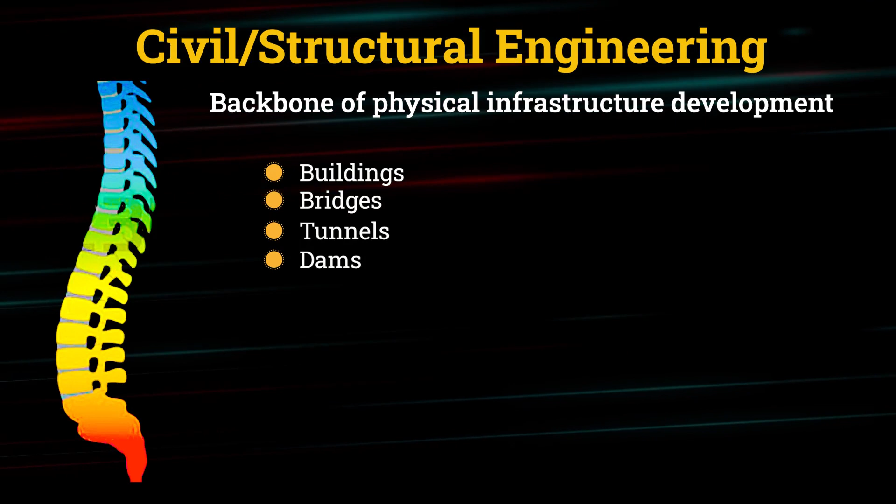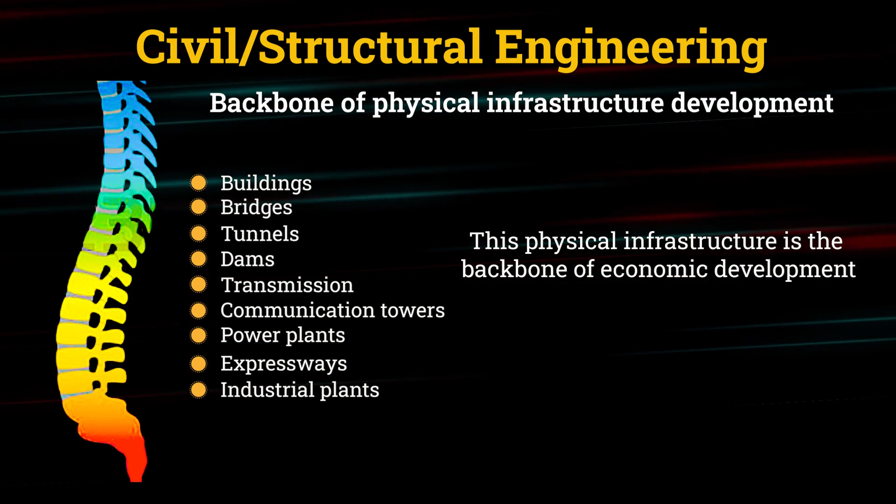This physical infrastructure is the backbone of economic development. So in a way, structural engineers are directly responsible for the economic development of the country and continuity of life. They help to preserve the past, protect the present, and build the future through reduction of the risk to disasters to the built environment.

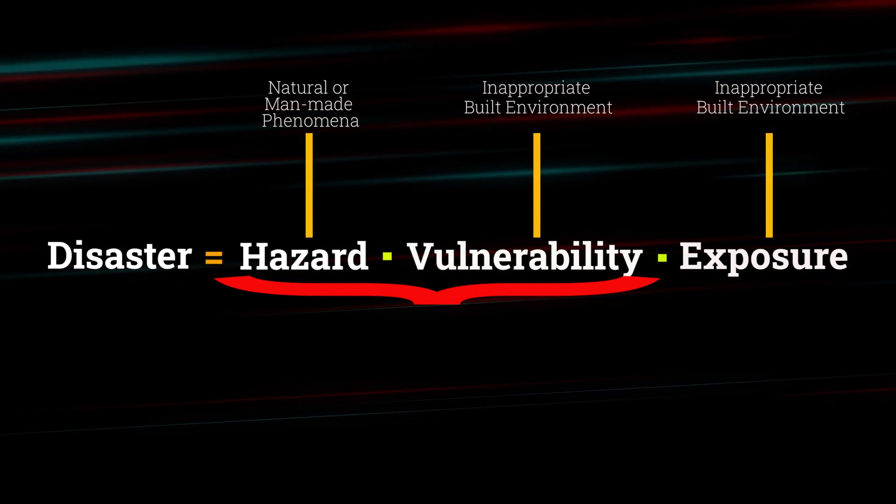So the economic development and life can continue. Disaster is a combination of natural or man-made phenomena, such as earthquake, wind, or fire, and vulnerability is the inappropriate or weaknesses in the built environment. The exposure is the people and property that are affected by this hazard. This risk can be reduced if we can reduce the vulnerability or make our structures perform well when subjected to particular hazards.

To do that, structural engineering has to develop its methodologies, its design process, and its approaches, and also integrate emerging technologies into its process, such as AI, robotics, and so on, and also develop the use of appropriate tools, software, guidelines, and other methodologies that can help the process.

Over the years, the design approaches have been developing, especially for seismic design, starting with intuitive design to code-based design, where several factors and various procedures are specified to tackle certain types of structures and hazards, to performance-based design, where the performance is explicitly evaluated and compared against the hazards. That leads to consequence and risk-based design and to resilience-based design.

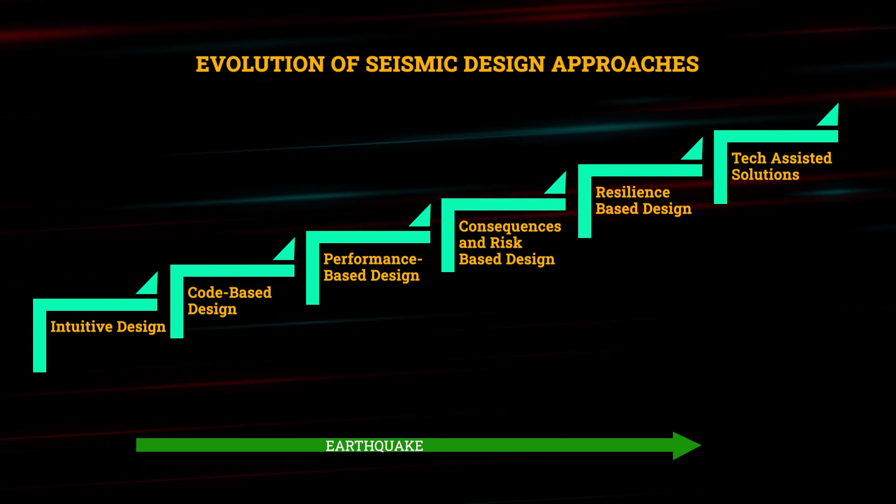And finally, the application of other technologies that assist in the design solution and also in the control of the structural response. Earthquake has been first to adopt many of these approaches, and wind design is following in its footsteps. Currently, mostly it is done by code-based design, but in many countries it is also progressing to performance-based design.

So let's look at performance-based design first. In performance-based design, hazard and the response fight directly and fairly to determine vulnerability, taking the code-based factors and restrictions out of the equation. So in this case, the appropriate hazard and the vulnerability are compared directly to see whether the structure will perform well or not.

The basic concept behind performance-based design, therefore, is to take the structural response, which is determined from the basic material response, such as steel and concrete, and the cross-section dimensions and the configuration, to determine the cross-section response, which in turn leads to the member response, and finally to determine its capacity through a pushover curve or any kind of nonlinear determination of the response.

On the other hand, the earthquake risk or seismic risk is determined through the time history of the ground motion, expected ground motion, converted into spectral acceleration and to spectral displacement, so that the two can be compared directly. This comparison between the structure's response and the hazard or the demand leads us to a common point where we can determine whether this performance is acceptable or not.

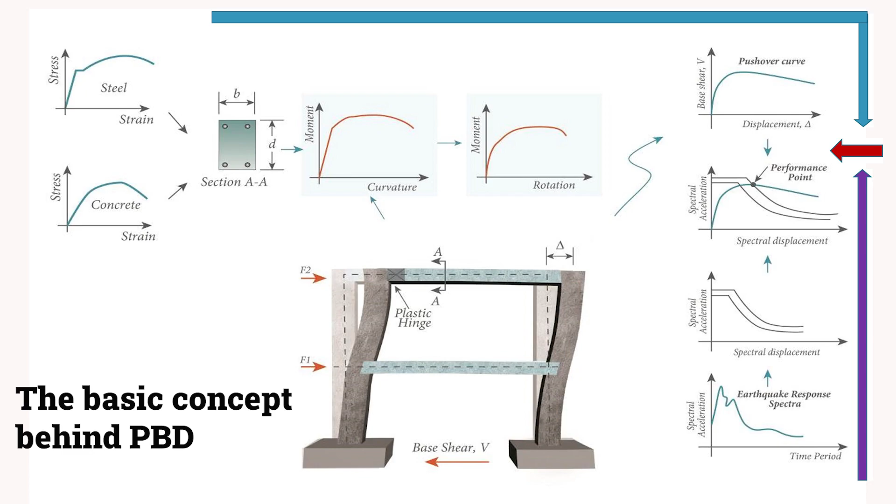And if this common point does not exist or is at a location which is not acceptable, then we can go back and modify the design, increase reinforcement, modify the materials, and so on, until we get the response that we expect. Therefore, the design decisions are explicitly linked to hazard levels and the key performance indicators.

The key performance indicators in structures can be many, but here we can consider some of them as the most important one, especially for the case of buildings. The first one, of course, being the stability, that the structure should remain stable. Second one is the strength, that the parts of the structure which are strength controlled should not fail. And then the deformation, the structure should not deform a lot.

Drift control between the stories, ductility of the members that will provide sufficient resistance to seismic demand, and energy dissipation together with ductility that will dissipate the seismic energy without causing unacceptable damage. And finally, the motion perception, that means acceleration and velocities and displacements produced during the dynamic response.

To carry out this kind of analysis and to determine these indicators, we need a thorough understanding of the nonlinear dynamic analysis. We also have to have an agreement of various stakeholders which are involved and to obtain the right information about the site and the materials.

And we need to have the right kind of software that carries out this analysis, and the guidelines to follow. Most importantly, we need to have an ability to interpret the results in performance terms so that we can see whether a certain response is acceptable or not. And because this is a very intense and complex process, we also need a lot of patience because it might take much longer than the traditional design.

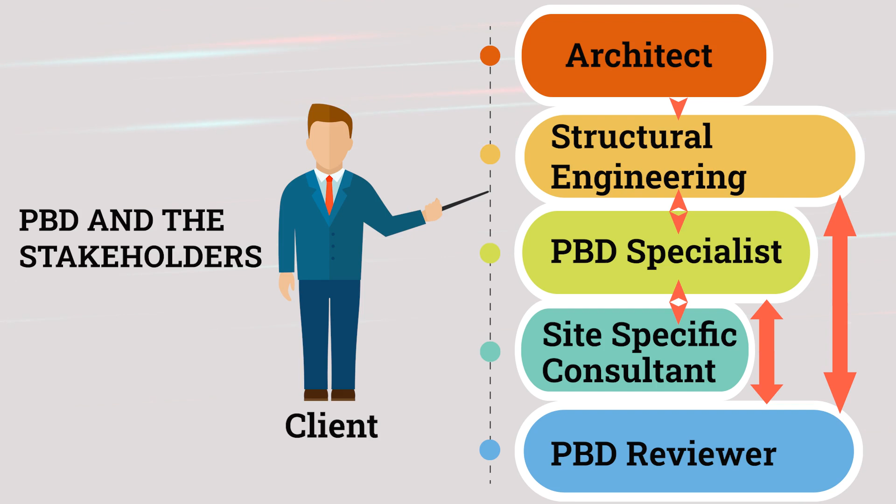The stakeholders involved in the performance-based design include, of course, the client, the architect, and the structural engineers. But on top of that, we also may need a special PBD specialist or a PBD consultant, a PBD design reviewer, and a site-specific consultant, all working together to ensure that the structure has the expected performance as required by the client as well as by the typical structure that we are designing.

There are several tools available to carry out the analysis, but from CSI, the three most commonly used tools include ETABS, which is for building analysis and design and has full capability to conduct nonlinear analysis and performance evaluation, and Perform 3D, which was specifically developed for performance evaluation, and SAP2000, which can be used for the nonlinear dynamic evaluation of any kind of structure.

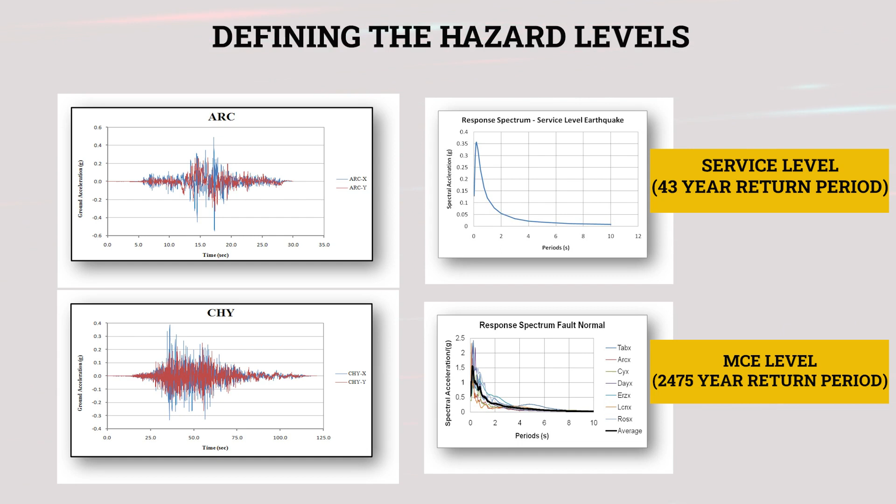The first step in this process would be to determine the right kind of hazard levels. And typically for seismic evaluation, two levels are used. One is the service level, which corresponds to a 43-year return period earthquake, which is expected to occur frequently. And the second one is the MCE level, which is a rare to very rare earthquake event that may come only once in 2,500 years, roughly.

Once the appropriate hazard levels have been defined, the next step is to define the corresponding acceptance criteria or acceptance levels. For example, for a service level earthquake, the frequent event, the structure is expected to remain fully operational. Whereas for an MCE level or rare earthquake, the structure might be expected to be damaged heavily or lightly, but in any case, preventing a complete collapse and loss of human life.

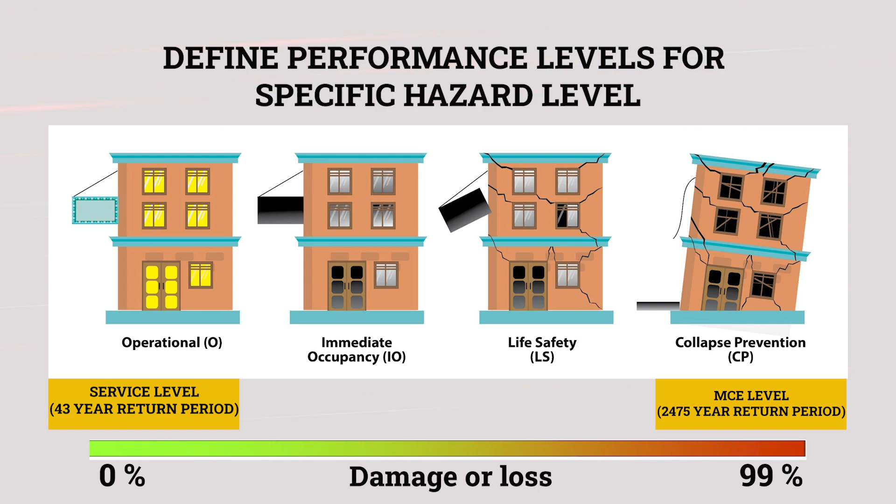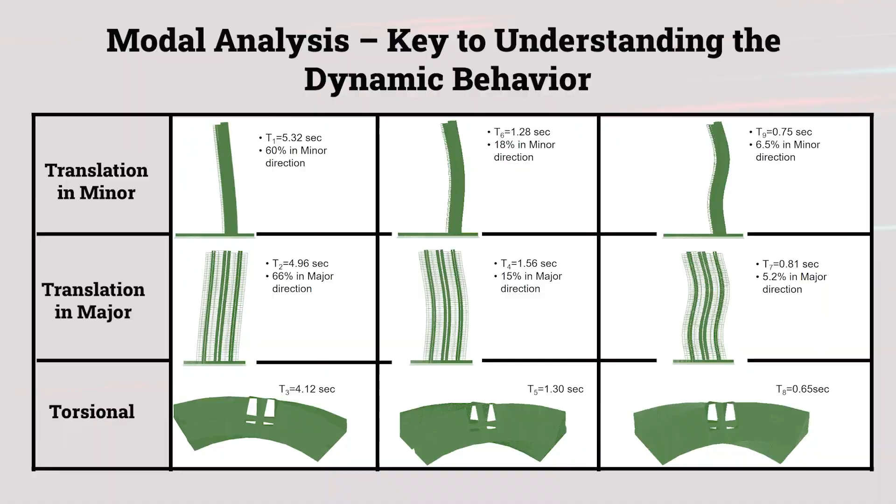To start the process of the analysis, the first step is to always determine the modal response and look at the natural period and the mode shapes as well as the mass participation ratio, to make sure that the model has been created properly, that the model has the right basic dynamic response, and the natural periods are within acceptable limits, as well as the mass participation ratio is appropriate for the structure to move to the next stages of analysis. Once the modal analysis has been determined properly, then we can be assured in a way that the dynamic response, which is a summation of individual modal responses, will be adequately computed.

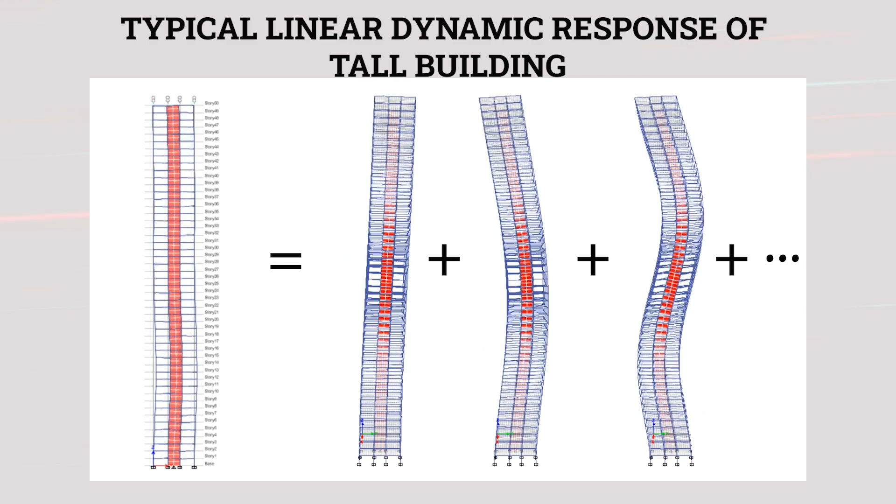The next step would be preferably to look at the nonlinearity of the structure and capture the nonlinear response before carrying out a full nonlinear dynamic analysis. This is typically done by carrying out a pushover analysis, which is a nonlinear static approach using monotonic loading. And this basically gives us some indication of the structure's nonlinear capacity, as well as its relationship with the yielding of various components, its weaknesses and its strengths.

In this particular video, we can see that the structure is deforming, and while it is deforming, it's also yielding, and the damage is occurring in some of the components at various locations. And this kind of analysis is useful to make sure that the nonlinear properties have been defined adequately.

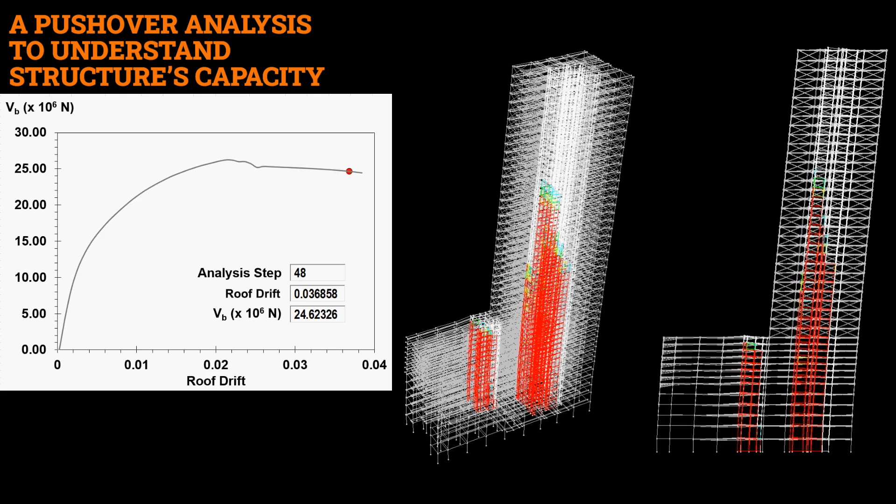The next one would be to carry out a full nonlinear time history analysis to determine the structure's vulnerability to the particular earthquake. In this case, several time histories have to be defined or determined, and the analysis has to be carried out typically from 11 up to 20 or even 30 time history analyses, depending upon the type of earthquakes that we are considering, as well as the type of structure being analyzed.

In this animation, we can see that once the ground motion input is provided to this nonlinear model, we can determine where the damage will start as the earthquake progresses, and then we can monitor the response of various components.

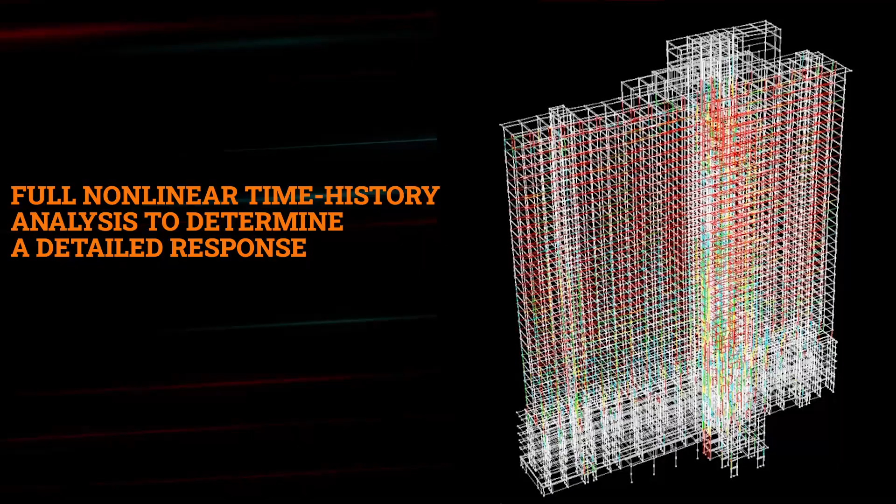In this case, we can see that some of the connections and joints are first reaching their capacity, followed by various other members in the structure. We need to continue this analysis until the entire ground motion is complete or the structure fails to continue to perform well.

Once the nonlinear analysis as well as linear analysis have been completed, it is always a good idea to compare the base shear generated from various types of analysis for various types of demands, so we can get a picture of the level of forces being generated from earthquake, from wind, at MCE level, and at the service level. This also provides a sanity check on the structure's overall response, because these percentages should be within a reasonable limit.

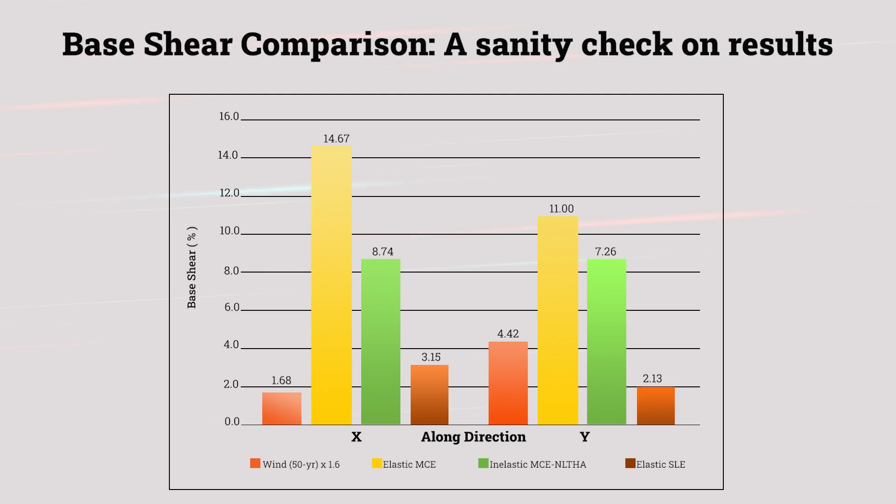Another important evaluation that we can do, especially for tall buildings, is the modal separation analysis, where we can look at the demand from each individual mode. This helps us see the effects of the higher modes' contribution to the overall forces, as well as the shear at the base and the moment at the base.

In this particular slide, we can see that the moment distribution along the height varies significantly depending upon which mode is being evaluated. In some cases, the yielding of the structure may be occurring only in the first mode and not in the higher modes.

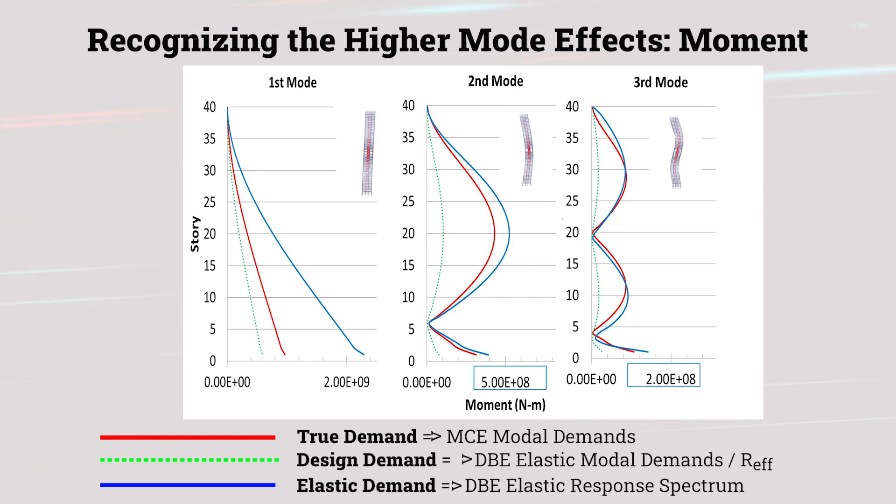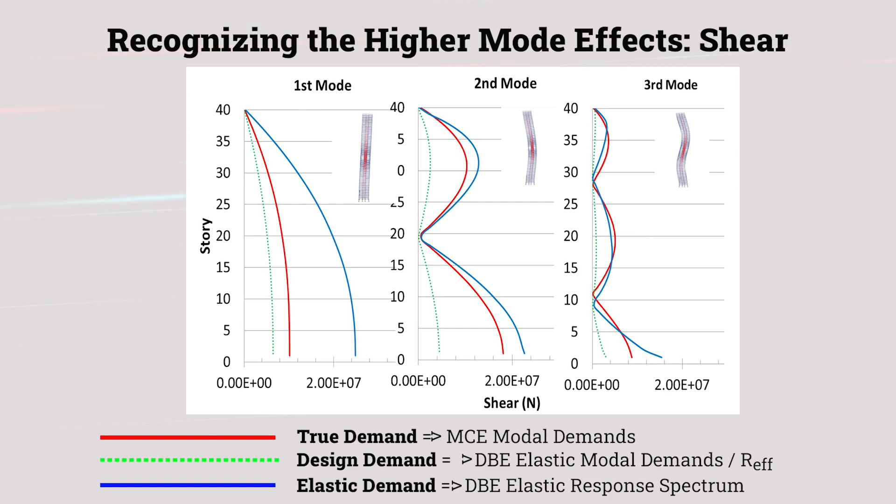This is especially true for shear, where the contribution from higher modes to the overall shear is much more significant than for the moment. This kind of analysis, done on top of the basic analysis, is always helpful to get a clearer understanding of the yielding as well as the reduction of the demand from various modal contributions.

We can also look at the shear capacity of the shear walls, which is a brittle kind of failure, and that gives us control on the strength capacity of the shear walls. This satisfies one of the 7 KPIs, which is the strength. Similar checks can be done for columns and other force-based components.

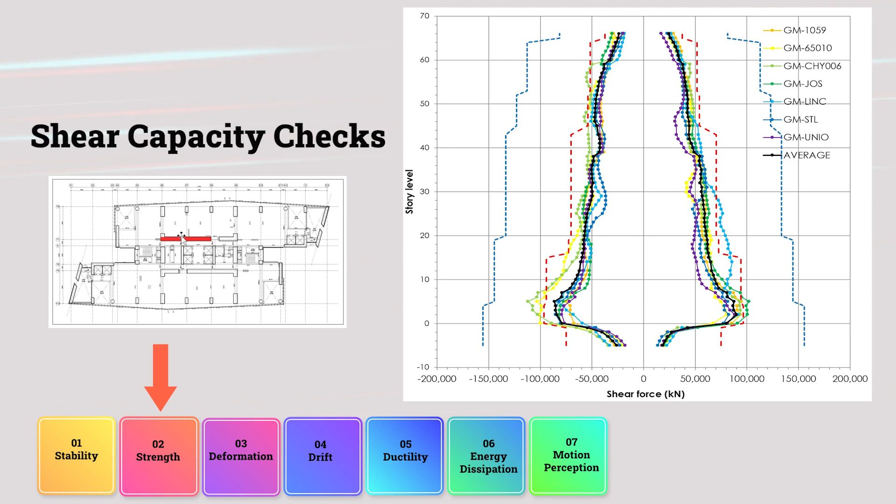The axial strains in the shear walls can be evaluated both for tension and compression, which gives us control on the deformation and yielding.

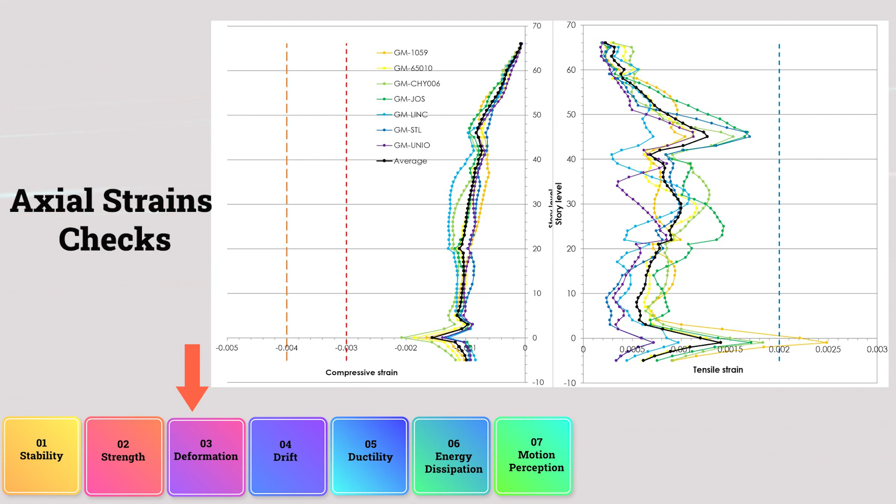The transient and residual drift checks can be performed for the structure for each ground motion, also for the average, which gives us control on the drift. It is important to note that the residual drift should be determined once the structure has come to a complete stop after the ground motion has been analyzed, to see if there is any residual drift in the floors, ensuring the structure is not damaged during the event.

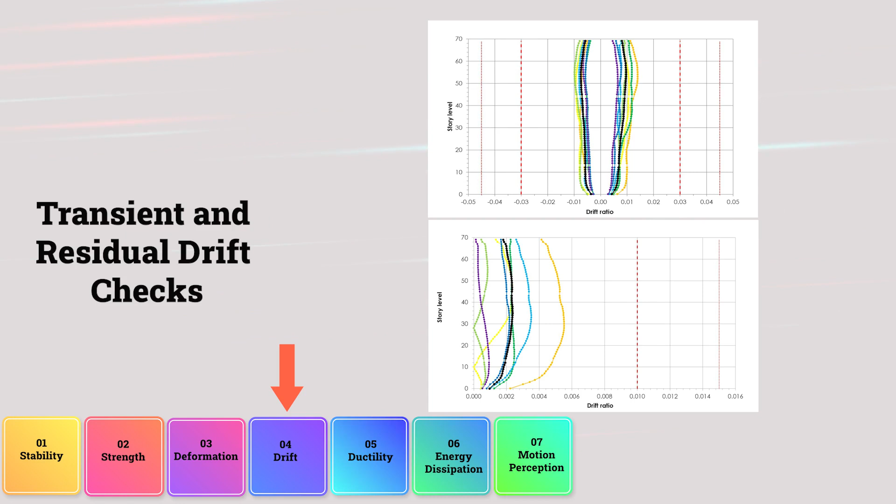We also need to check the coupling beam rotations, which typically act as the building fuses and contain a lot of ductility as well as energy dissipation, making sure they do not collapse. This gives us a check on ductility.

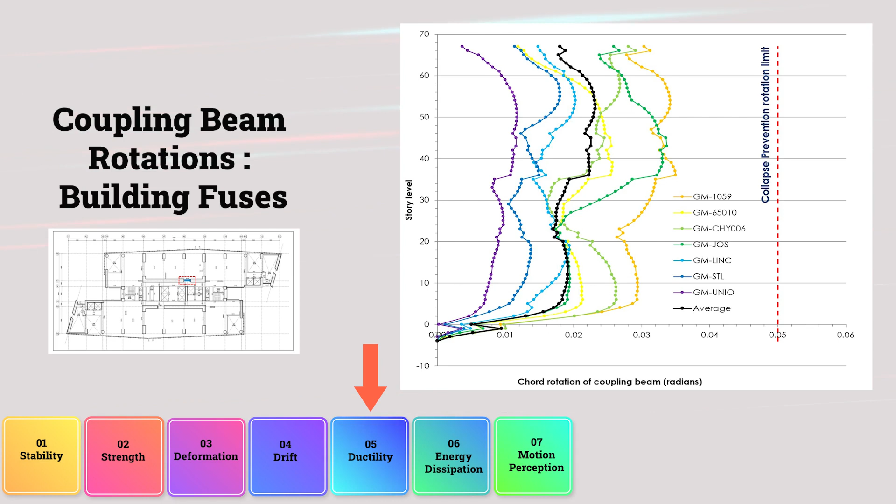Another important check is the dissipation and balance within the structure, so energy balance in terms of total energy from various types, for example elastic, damping, and so on, and the inelastic energy coming from the deformation and the ductility, which can then be further investigated into various components such as shear walls, coupling beams, and diagonally reinforced coupling beams, and so on.

This gives us an idea of which components are providing the most ductility and contributing to the energy dissipation, and they should be designed and detailed more carefully. This gives us a control or check on the energy dissipation levels.

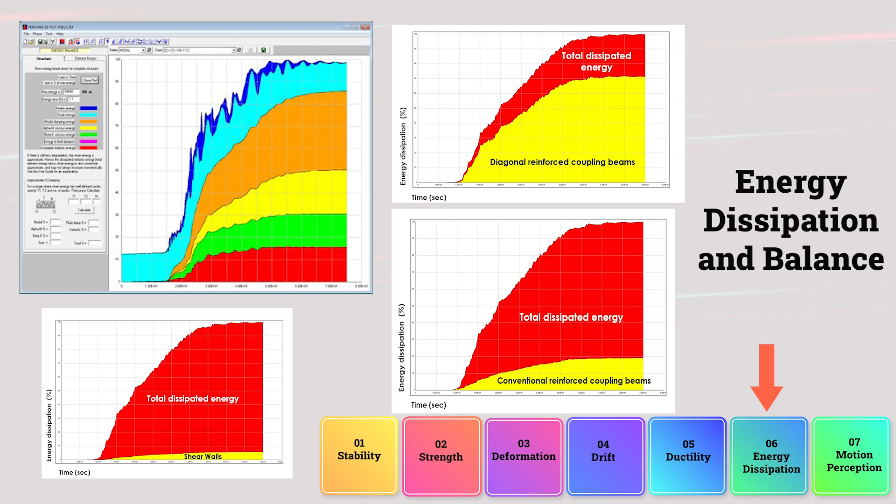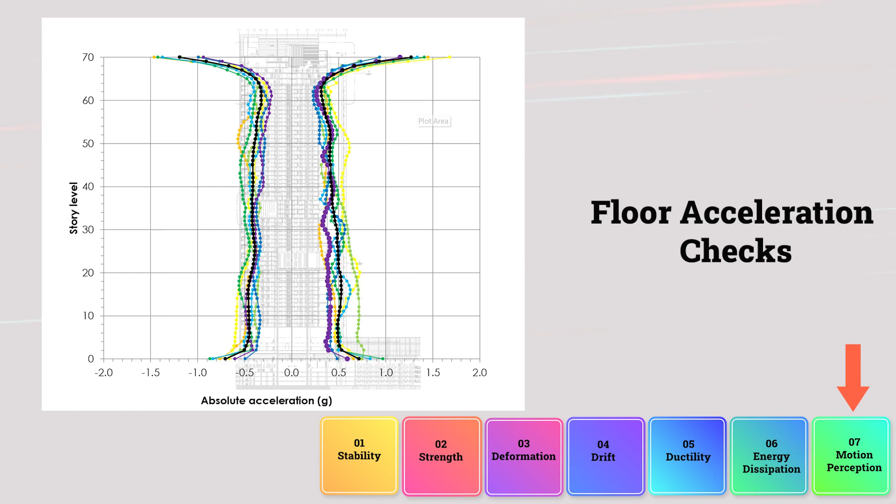The last check could be looking at the absolute acceleration of each floor. This is useful information because we need to control the motion perception by the people occupying the building.

This analysis that we have just talked about is typically for earthquake, and it is commonly used in many countries to do the performance-based evaluation for seismic design.

Similar approaches or guidelines are being developed also for wind design. The most recent document is the Pre-Standard for Performance-Based Wind Design by ASCE, which also provides guidelines on how to do nonlinear evaluation of buildings for high or longer return period winds, and also for more controlled perception at the service level.

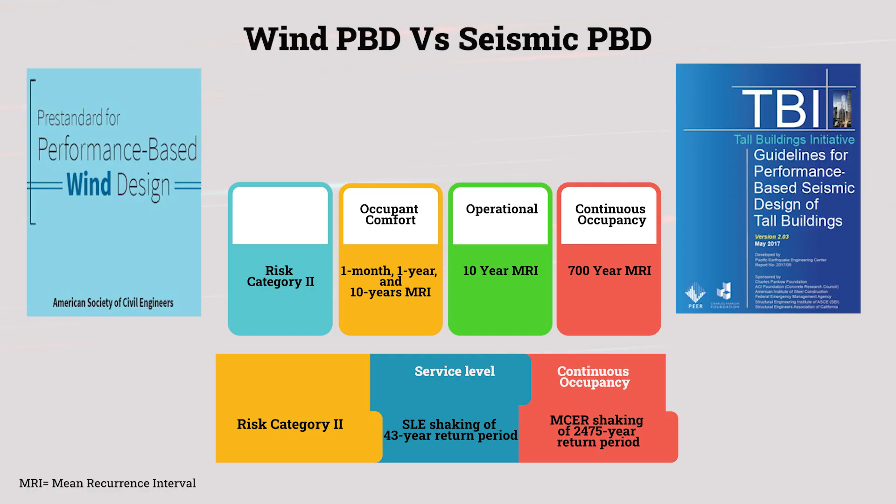The wind PBD is an area that is being developed, and it normally needs to be carried out together with the wind tunnel study. We have looked at the performance-based design. Let's also look at the resilience-based design, which goes a step beyond the basic evaluation of the structural performance.

This looks at not only damage to the structure, but also its effect on the loss of quality of life, the economic losses, and the loss of community and culture. This looks at resilience as a bigger impact rather than purely the performance or damage to a particular structure.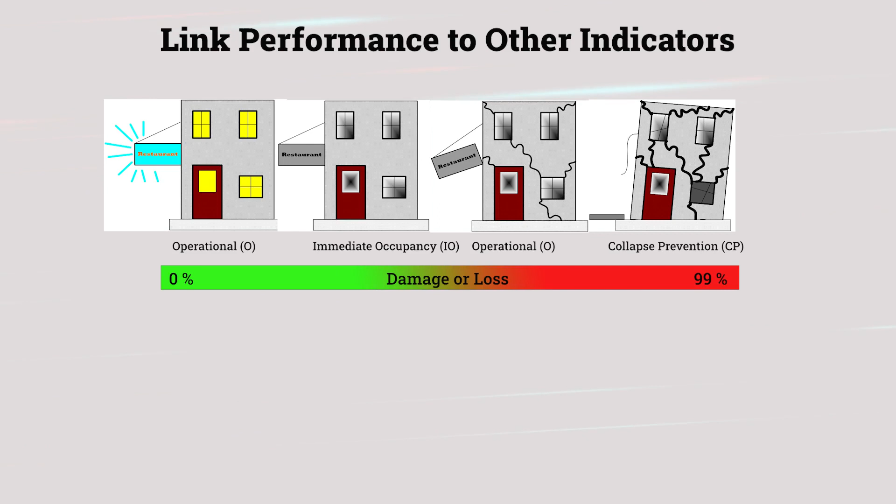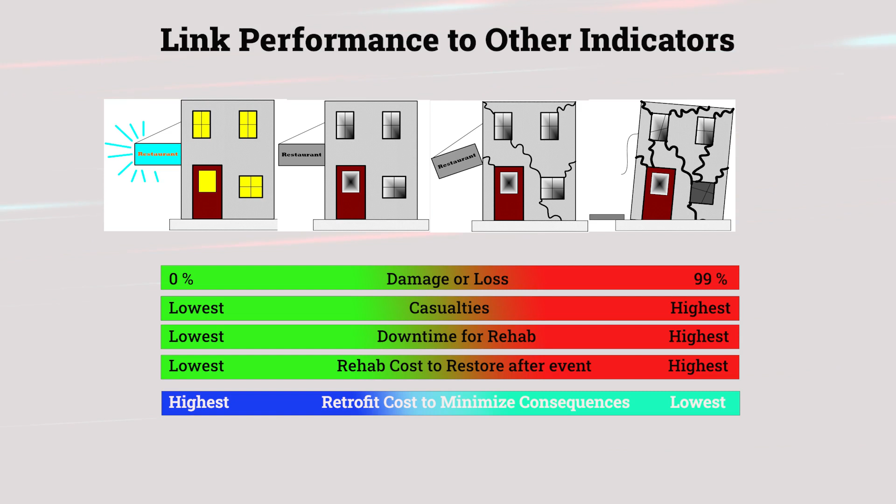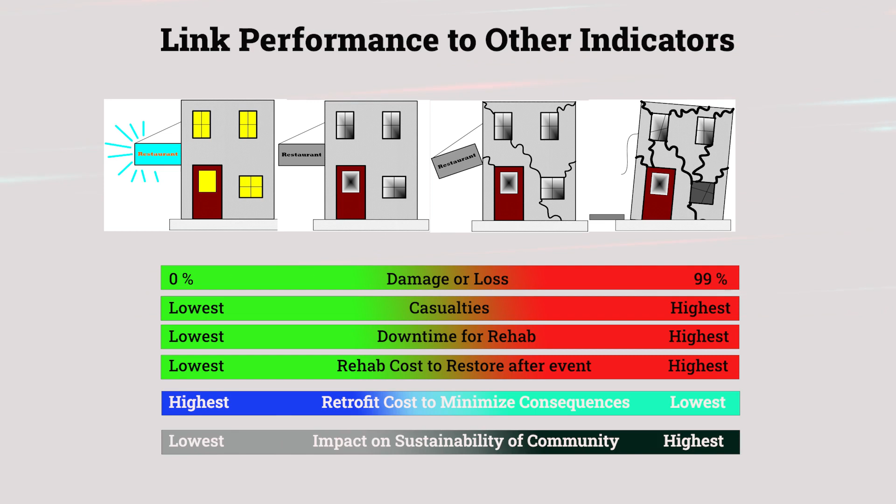So in addition to the damage or loss of the structure, casualties, downtime for rehabilitation or retrofit or repair is also looked at. And also the cost of such repair is evaluated. This complete evaluation of the impact of earthquake leads us to provide more information to the community in terms of the resilience of the entire system in which the structure is one part. And this can help to determine the sustainability as well as resilience of the community.

Just like the US Green Building Council was established a long time ago to look at the development of green buildings, a similar organization has been established, which is US Resiliency Council, which looks at the resilient buildings. This initially started by many organizations, mostly led by Arup and supported by the US Resiliency Council, and came up with the standard called REDi, or the Resilience-Based Earthquake Design Initiative. This has been developing in continuation of the earthquake seismic design and the performance-based design.

Let's look at some of the key components of the resilience-based design. And the first and the most important one will be the importance of non-structural components and the damage caused to them during earthquakes. It has been determined through studies that the structural cost is not the primary cost in a particular building, and the cost of the non-structural components and the contents is much larger than the cost of the structure itself. So while the structural performance is important, protecting the non-structural component and its content is even more important in terms of the impact on cost and rehab time.

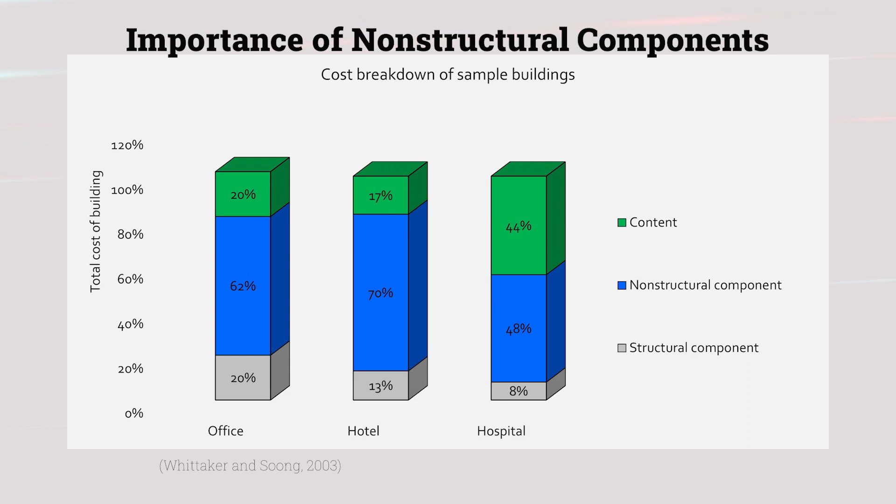So the overall process used to carry out resilience-based evaluation, including the performance-based evaluation, will include all of the steps involved in the PBD. And after that, based on PBD, we can then determine indicators such as the accelerations, floor displacements, floor velocities, and then use that information to determine non-structural damage. And from that, we can determine the direct economic loss or the repair cost, also the downtime, and also any possible serious injuries or casualties, and the business interruption cost. All of these together, when evaluated, give us an idea of the resiliency of the particular structure. This kind of evaluation is far more useful to the community than purely designing a structure to code-based procedures.

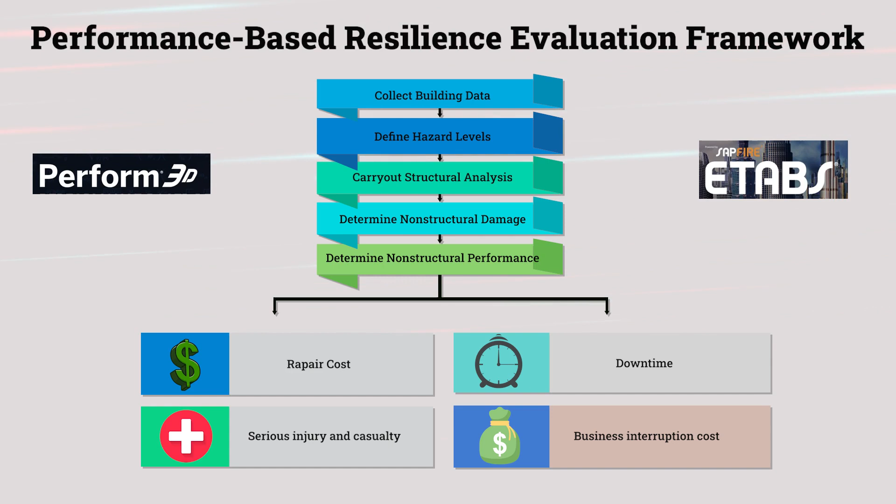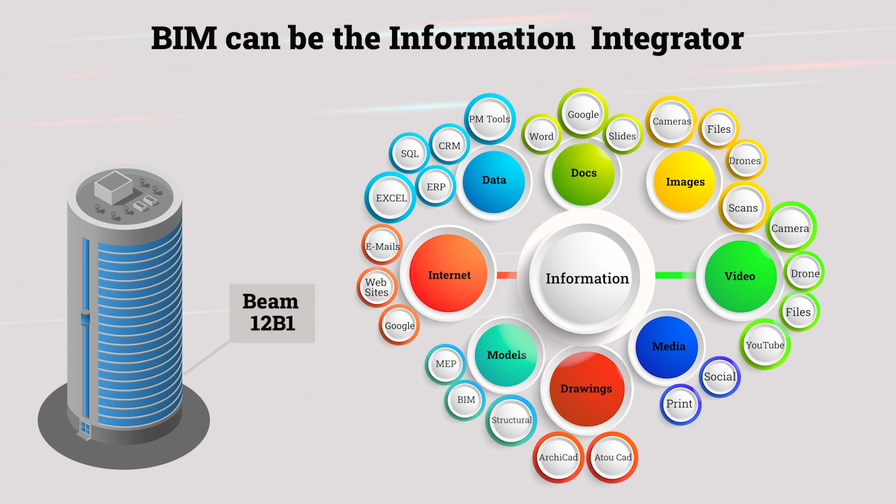Let us look at building information modeling and its relationship to structural design and detailing. BIM has become a basis for managing the entire project lifecycle information, and many stakeholders, including the architects, engineers, contractors, material suppliers, are now using BIM as the platform for conducting their work. BIM can be an integrator of information because it provides us with a way to correlate the various information of the project with a particular member or particular component of the structure, which is parametrically defined. And this relationship and this physical nature of the information gives us a way to manipulate and manage the information in a more consistent manner.

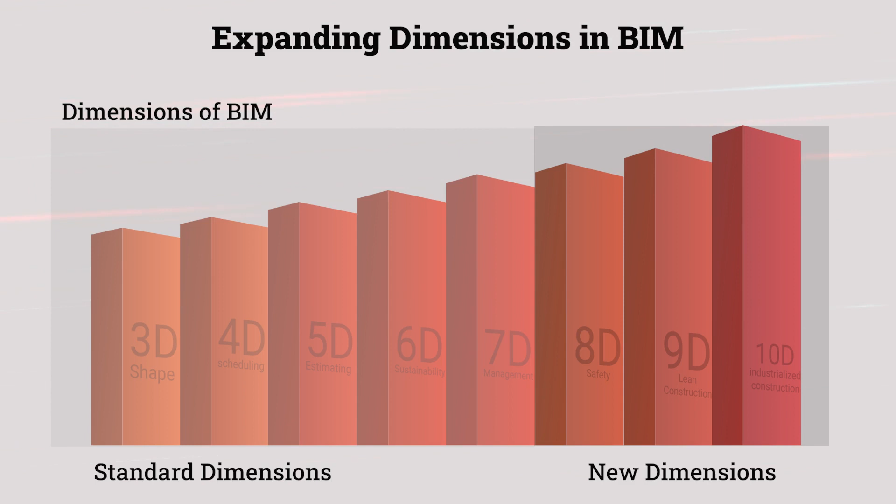BIM has been expanding its dimensions in terms of how many life cycle components it handles. In the beginning, it was restricted to 3 to 4D, meaning dimensions and time, and then until 7D, which includes management, sustainability, and estimating. And now we are also seeing expansion to safety, lean construction, and industrialized construction. Similarly, the level of detail represented in BIM models is also increasing, from LOD 100, which is a basic information, all the way up to LOD 700, which contains the information not only of the structure to the final detail, but also information on how to dismantle or decommission the structure.

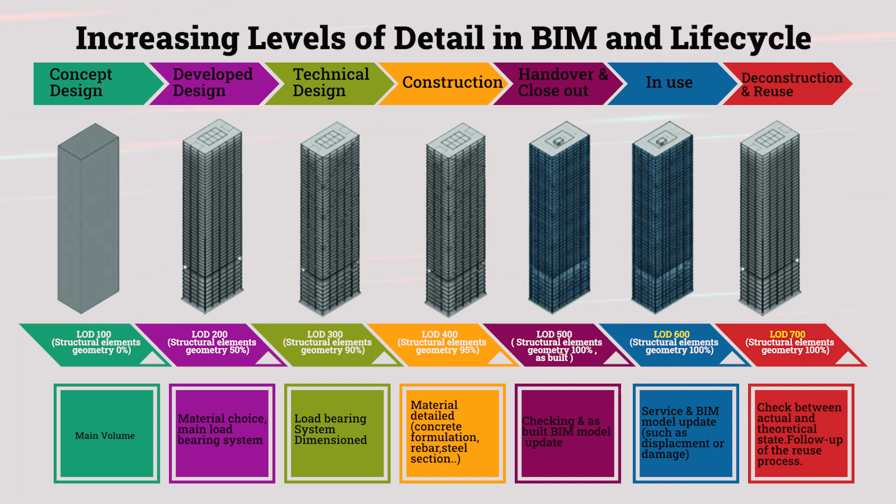So we can see that both the dimensions and the level of detail are increasing. Structural engineers can take advantage of these enhancements in the BIM model. ETABS, for example, carries out the design and detailing of reinforcement in a very integrated manner.

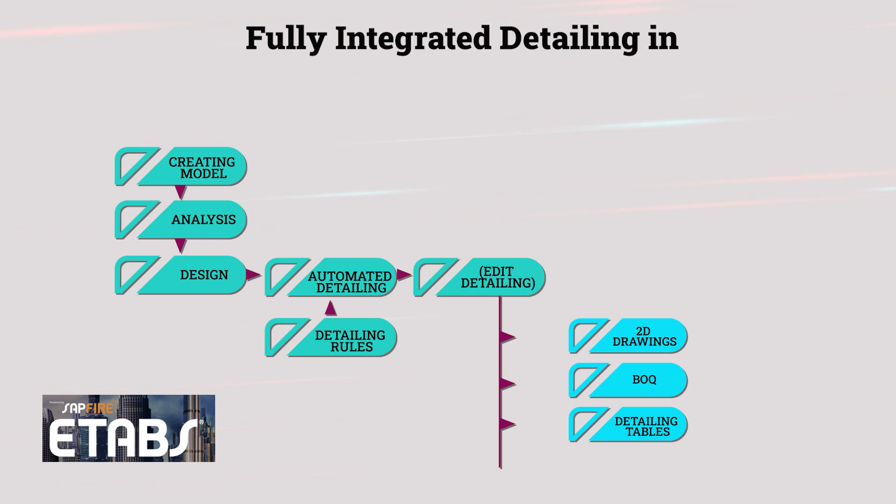This automatic detailing is then available for users to edit. After editing, they can produce 2D drawings, BOQs, rebars, and 3D cage. However, to make it compatible with BIM models, this information is also transferred to other software.

First in 2D drawings, for example, through CSiXCAD to AutoCAD, and through a complete information model through IFC, which other software can then connect and utilize, and more directly through CSiXRevit to Revit using the full BIM implementation.

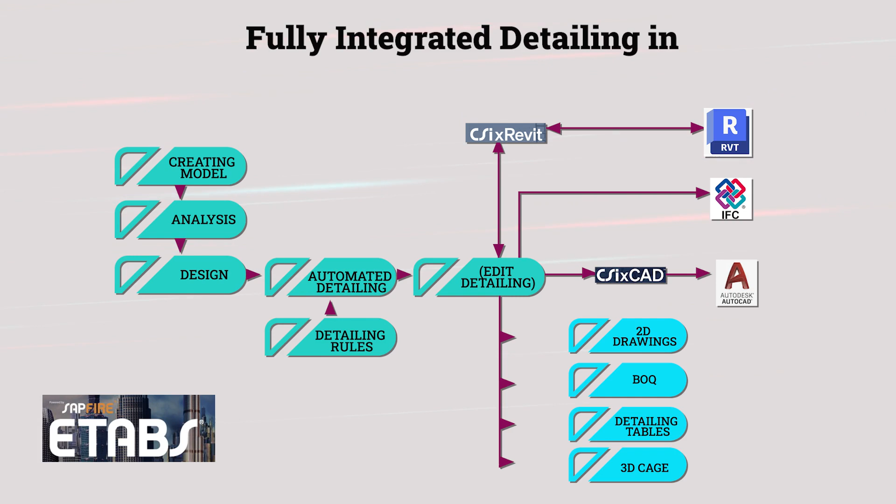This fully integrated detailing, not only within the program but also with other programs, provides a great opportunity for structural engineers to share and use their information across various lifecycle steps.

This is one of the views showing various functionality available in ETABS detailing, which can detail concrete beams, columns, slabs, and walls, in addition to steel columns and steel beams.

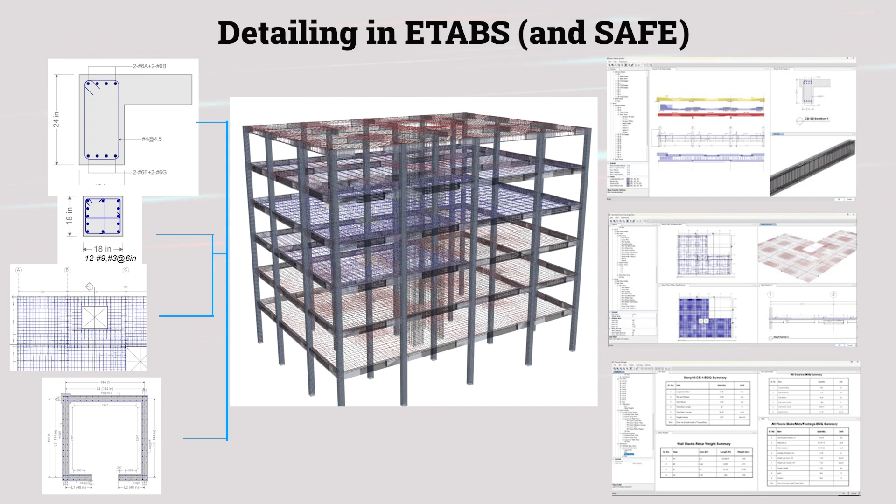The detailed reinforcement is converted into a 3D model, as you can see here, with every rebar individually shown. This information can also be used to update the design capacity and also to prepare drawings and various cross-sectional and elevation views.

As you can see here, this information can be edited by the user to refine the design, customize the design, or to provide reinforcement as needed at various locations.

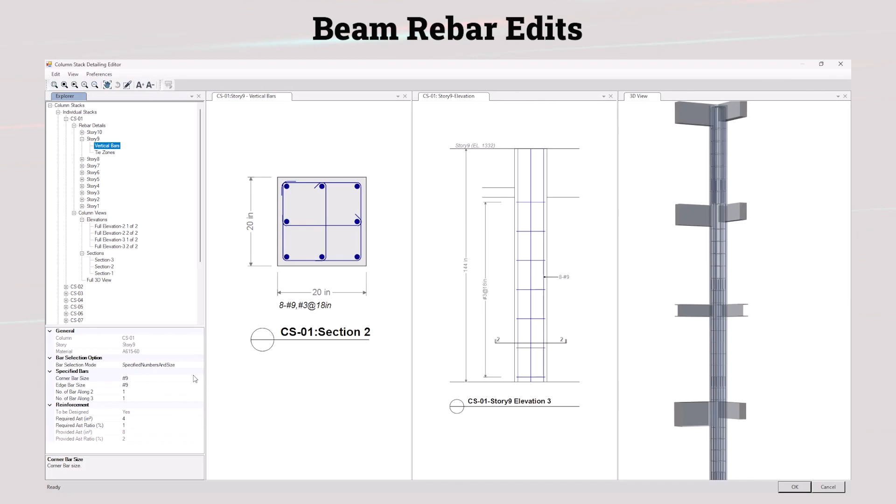They can also use the views generated by the program to create the drawings as they deem fit. These drawings can be printed directly or exported to other formats. This editing ensures that engineers have full control of the final detailing being produced.

This information, once completed in ETABS, can then be transferred through IFC, which can be opened by other programs that work on IFC models, and also through CSiXRevit to the Revit program.

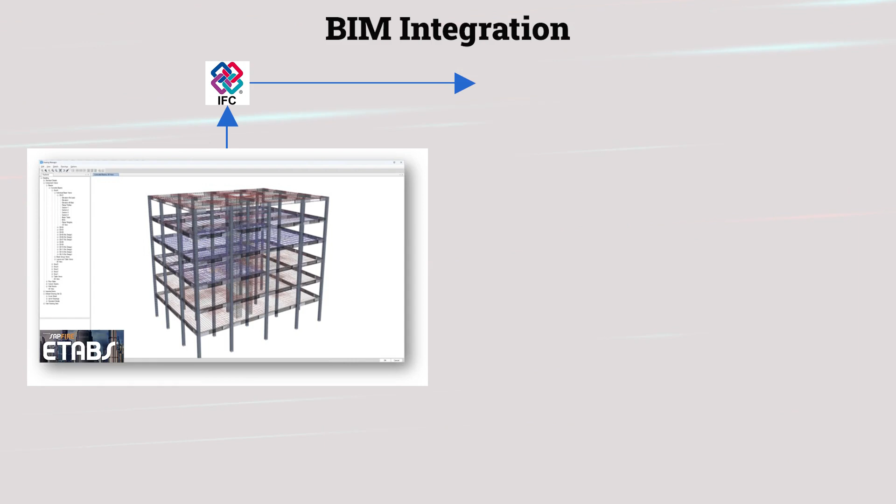In the future, the reinforcement generated by directly working with BIM models could be used as a basis both for preliminary design, detailed design verification, cost estimation, BOQ generation, bar placement, schedulers, clash detection, and so many other purposes. And this can be expanded to other components.

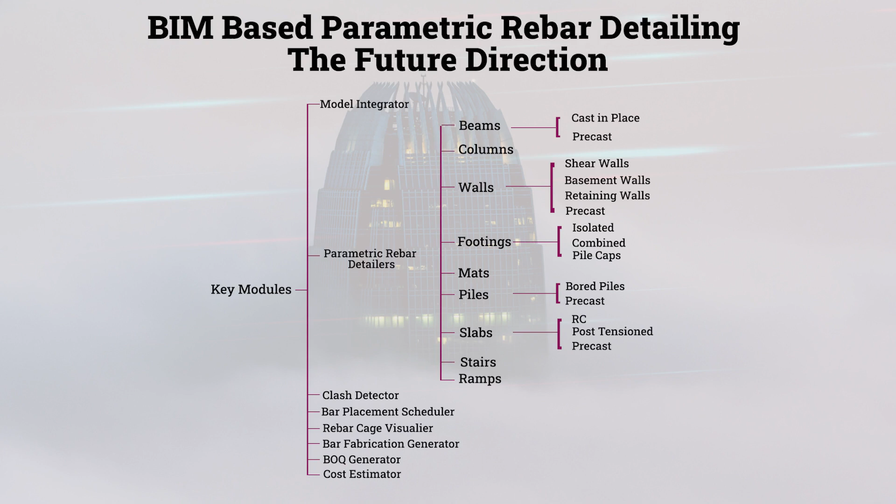This is the way CSI is working towards integrating reinforcement detailing into BIM models. Let us also look at some of the other applications of related technologies in structural engineering application.

The first one is the use of imaging through drones, through cameras, and also through LiDAR scans to create 3D models. These 3D solid models can then be used to create appropriate structural models, and the response can be determined for a given event, such as earthquake or wind. This can help to preserve historical buildings and existing structures for which direct measurement may be difficult.

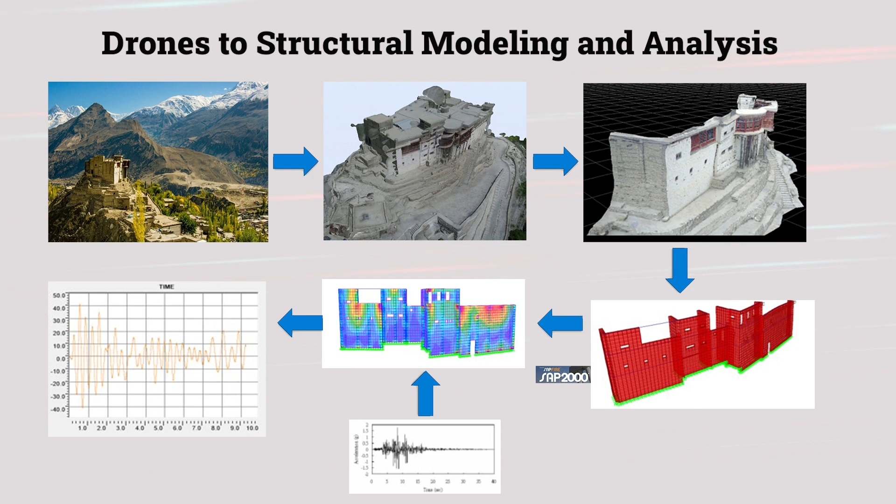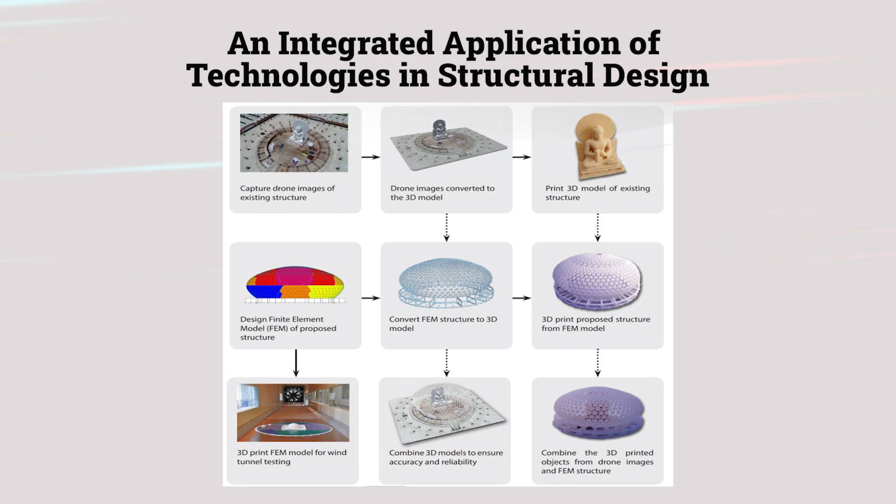Similarly, scanning, both LiDAR scanning as well as drone imaging and other imaging, can be used to create models of existing structures, and then 3D printing can be used to print such models, which can then be placed in the wind tunnel to determine their response to various levels of wind. This information can be brought back into structural models to determine the response for time-varying wind pressures.

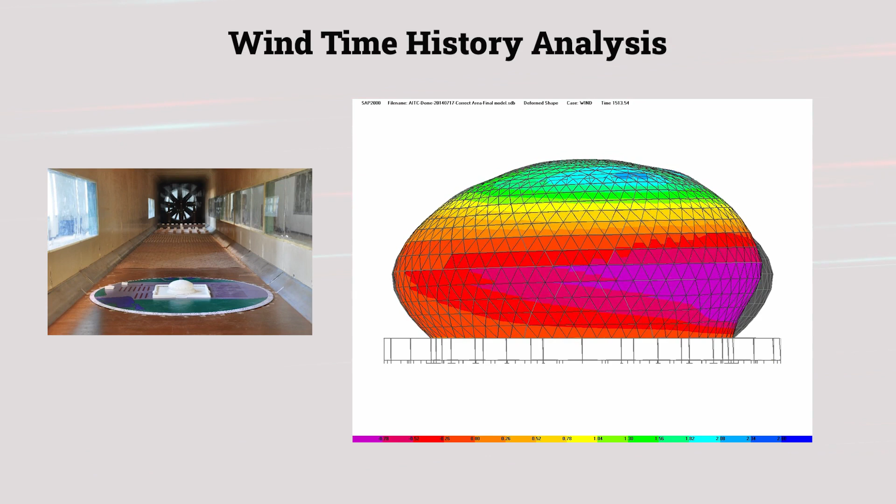For example, here, the results from the wind tunnel analysis are used to carry out a nonlinear time history analysis for wind for this particular structure, whose response is quite important due to its flexibility.

We can also use cloud-based systems to provide access to engineers for structural information using their handheld devices on the go. This is quite useful because many times this information can be helpful in making decisions at the site.

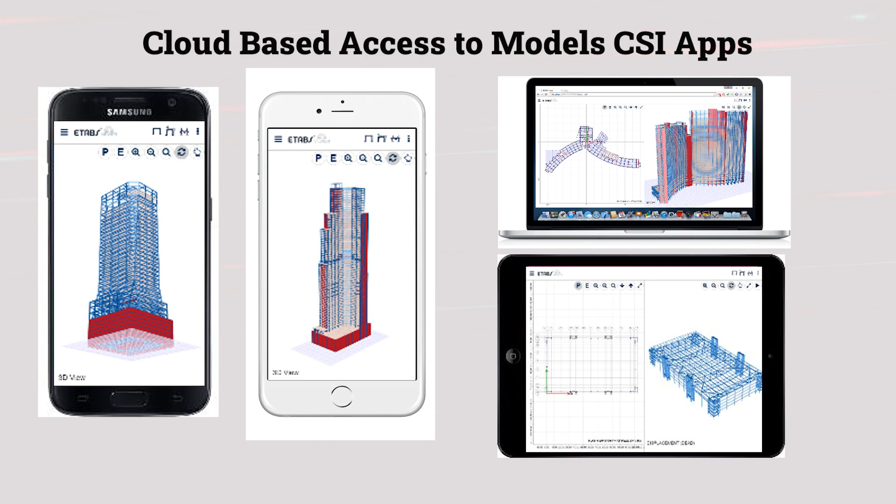AI models can be used to predict the response of buildings when they are appropriately trained on existing structures which have been previously analyzed and designed, so that for preliminary design, we could use the architectural design input and directly obtain the code-based design or performance-based design indicators.

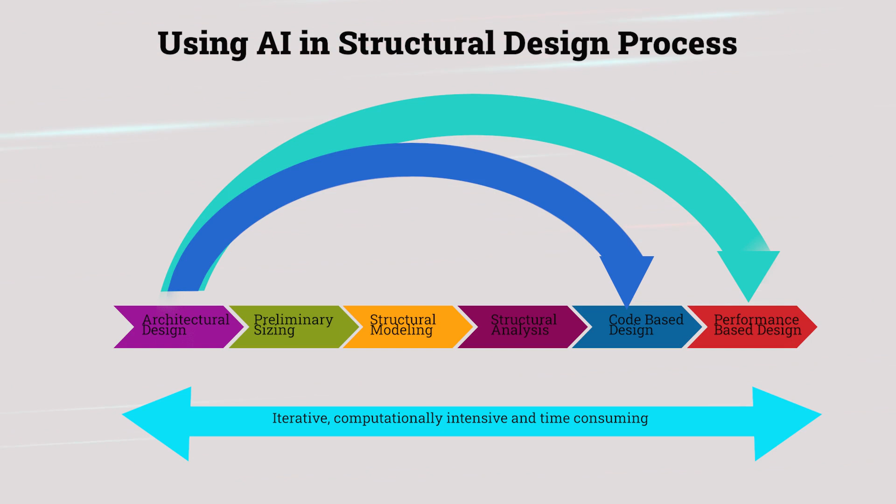This can eliminate the time needed to carry out this complex analysis, especially for preliminary estimation, and also provide a sanity check on the results we have obtained by comparing them to previous experience.

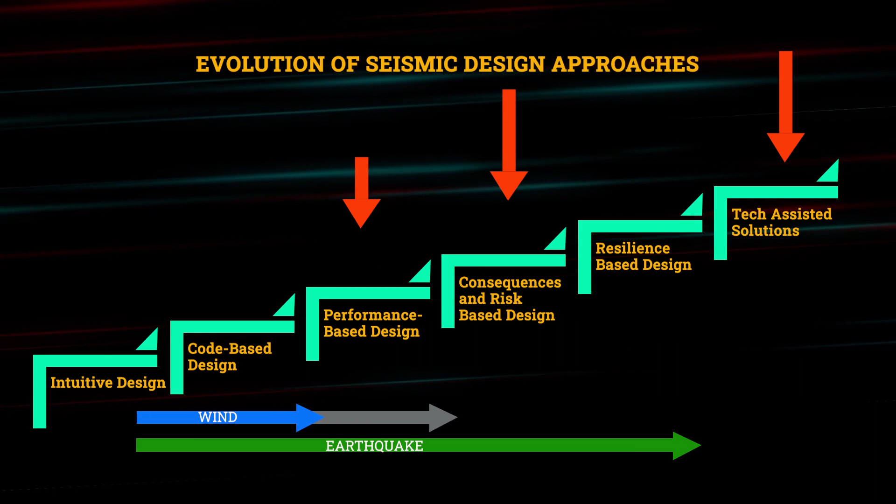So in this talk, we have covered several topics, including performance-based design, consequence-based and resilience design, as well as the assistance of various technologies in the structural design process. We hope this information will be useful for you in your structural design as well as in future work.